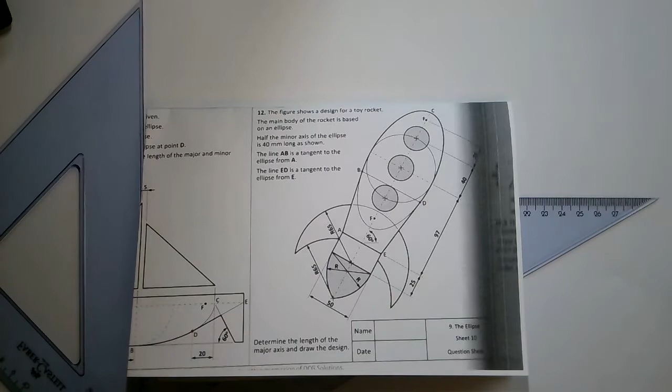All right, so this is the question that I gave you the last day. We're going to go through it quickly. Now, I'm also going to point out, when I go through this question, the last day I had my T-square and everything else set up. I'm aware some of you don't have those, so we're going to do this question entirely off set squares, just so you can see that it is indeed possible.

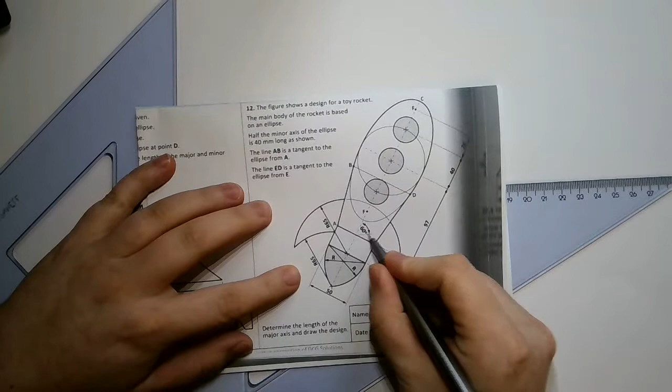So, with this question, we're going to have a look at the key features of it. Now, it is pitched at 60 degrees, so this major axis is at 60 degrees. So that's an important thing to notice. Okay. There's an ellipse here. There's a circle here. And this is just a small detail. So the majority of your marks for this question, if you're in an exam, would go for the ellipse. It would actually only be about 50-50 for the two of these.

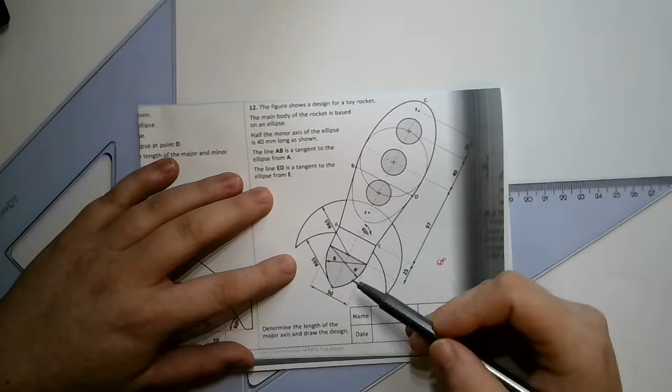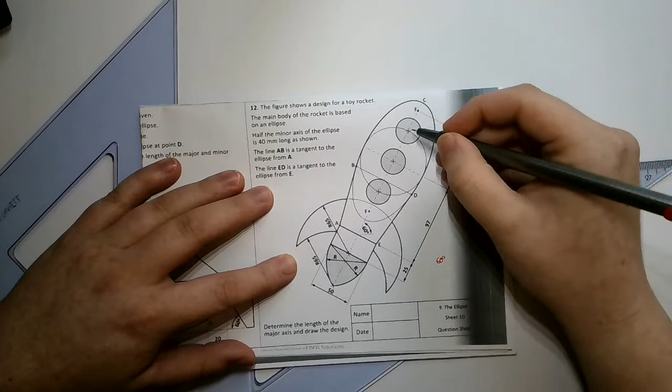Okay. Other thing they have is they've given you a focal point. That's great. And they've told you the distance that is out from the center. And they've told you the radius here of the minor circle. So once we have those, we should be able to find our major circle, because our major radius will be from here to this point here. So that distance will be our major radius. And we'll be able to work through the rest.

So, starting this question. If you just have set squares, what you're going to do is you're going to set your set squares up like this. So, have it so they'll be able to slide like that. Bring this one up. Line it up at the top of the page. Bring it down. Now make sure you keep your anchor set square completely straight. And scribe a line. Nice light line. Across the middle of the page like that.

I'm going to zoom you out a bit there so you can see a little bit more of what's going on. Now, as I said to you before, they've said that this goes off at 60 degrees. So, what can I do? I could set my set squares up like this and go a really, really complicated way around it. Or what I could do is I can use my set squares. I can line a horizontal set square up like this and drag it down and treat this kind of like my T-square here now, so that stays still. And they said it goes up at 60 degrees. So bring this over to roughly the middle of the page and bring my axis line at 60 degrees. So that's the first main part. We have our line that's going at 60 degrees.

Now, I'm going to go to check what size that was because my printout here isn't very clear. So that's 26 millimeters to the focal point. Right. What I can do is I can also set up my set squares like this again. And between the 60 degree and the 30 degree angle, I can slide this over and just draw an axis line here. I don't know where that is yet, but it's in enough so that I might be able to just draw out the detail for this section here. All right, just make sure that the focus is working on this.

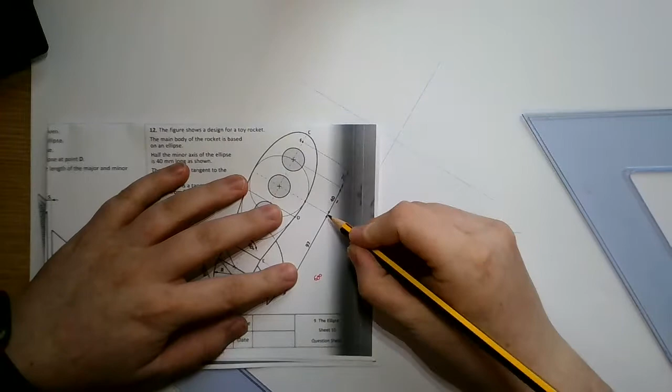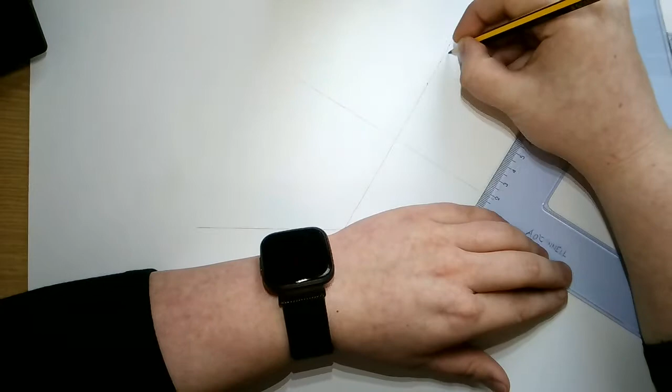Now, so what can I do? I can measure out 40 along my line and I can measure out 26. So I can measure out 40 millimeters. Remember, that's the radius of my minor circle. And from there, I can measure out another 26 millimeters. I can extend that line and go to 26. And that's where my focal point is. So label that F2. Grab your compass. And from here to here is our minor circle.

So we can swing that. So this is the minor circle of our ellipse as well. Just remember that. We know that the distance from any focal point to the end of the minor axis, that's the radius of the major axis. Give it a second to focus there.

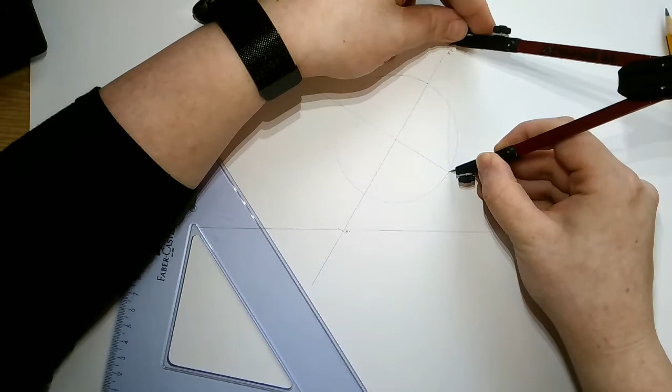And what I can also do is I can measure the distance from here to F2 and swing that back the other way to show off where F1 is. Okay. So I'm going to mark off where F1 is. Coincidence that it's that close to the line for me. F1. I said this is the radius of the major circle, so I'm going to take that distance and swing another circle around.

Okay. So we have this much information. I'll zoom in just to this for a second. Now, don't know if you remember all along that I was being really, really specific about saying whether the lines that were coming out from the ellipse to draw an ellipse were horizontal or vertical, because they're not. As I said to you before, guys, if it's for the major circle, it goes, hold on now, let's go backwards in my head. So if I was drawing this, we'll split into 30, 60 to make our lives easier.

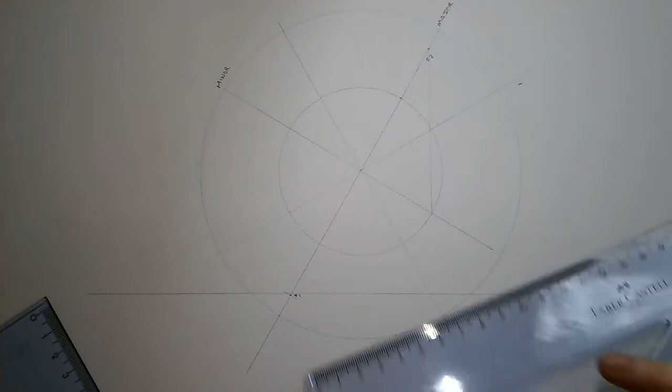So I'll line that up with, line our set squares up like this. Okay. Now, once I have my set square lined up like that, I can do my angles. So divide it into 30, 60. Remember, it's 30, 60 degrees from the axes. And if you need to label the axes so that you'll be able to find them, that's okay too. So this is my major axis. This is my minor. Just so that it's easier to find. What you could also do, guys, you could turn your sheet sideways if that'll help you. Okay. So we have this.

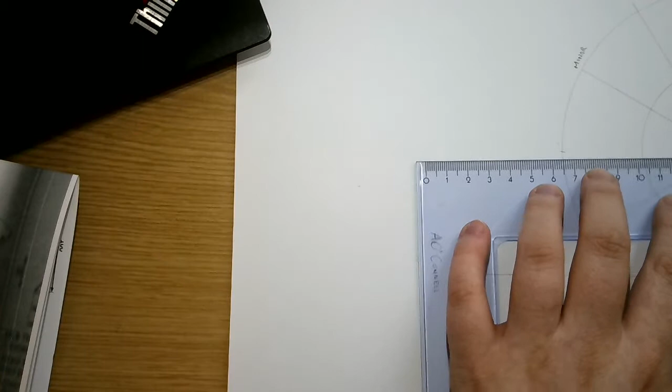I need to find all the angles I haven't put down yet now. I'll just move you out of the way a second. I'll do my next angle. And I'll do my final angle then. So this is just breaking down the 30, 60. I'm just cheating here. Don't mind me. Okay. So we have our 30, 60s drawn in there.

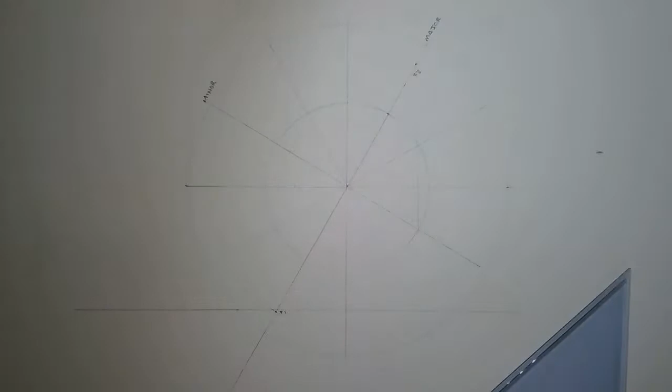Now, this looks super complicated to you. So I'm going to say for your first one, you can turn the page so that it looks like normal and retape your page down. That just takes a bit of time. So I want to keep it like this for my drawing anyway. So what we said before was that if you have a line and it's coming from your major circle, so your major axis, your major circle, okay, line these up. So if it's coming from your major circle, this one up here, or this one here, it goes towards your major axis. So this one comes down, this one goes up. That's why I'm really specific about saying that, lads.

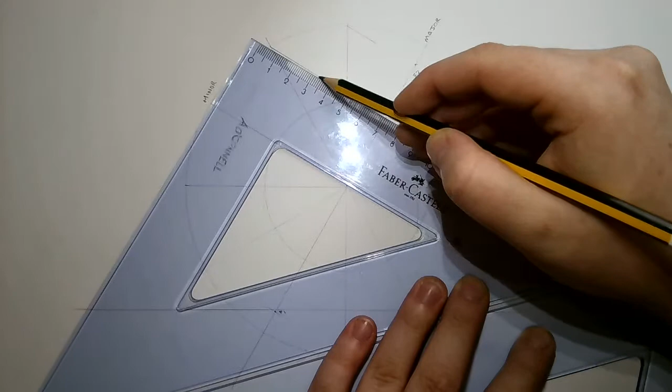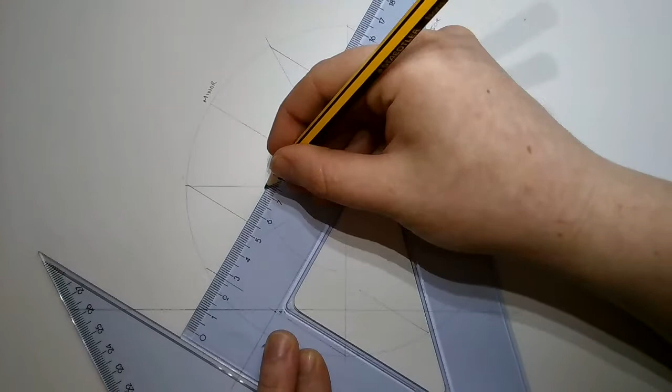It goes parallel to the minor axis, but it still goes this way. All right, make sure it's parallel with the minor axis. Bring this in. And if it's coming from the major circle, it goes towards the major axis. From the major circle towards the major axis. Okay. And the other one we've said, I'll do this one actually, is parallel to the major axis this time. If it's going from the minor circle, it goes away from the minor axis. So the small little fella runs away, the bigger fella runs towards the fight, if I can use that analogy.

Okay. Bring these lines out. Remember now, lads, this is a little bit messy. And again, the reason it's messy is because I'm doing my lines a lot heavier than you should be, so that you'll be able to see them. Now, once I've that done, I can plot my points. I'm going to do this in colour again, just so you can see it. So there's 1 point, 2, 3, 4, 5, 6, 7, 8, 9, 10, 11, 12, and back to 0 again.

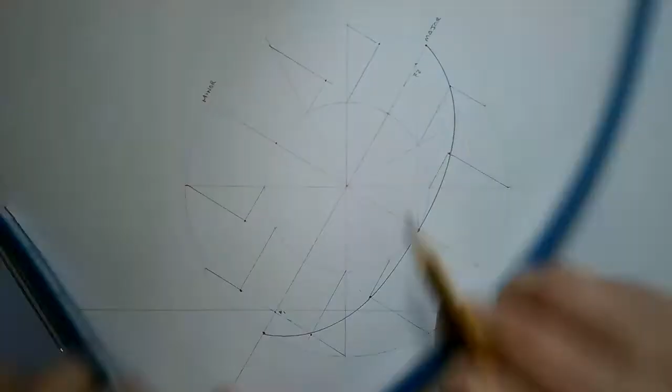So that's my ellipse. Now there's this fun little tool, you don't need it, but it just makes my life a little bit easier, especially when we're on the camera. So you don't need to run out the door telling your parents you need to buy this, guys. That's that bit of the curve. Oops. Okay, put this one in. And so on and so forth. So just give me 2 seconds to do this.

And the last one. Alright, so there's the ellipse drawn. Not the best thing in the world. That shouldn't be as pointy as it is. But still, with the main bit of that work done.

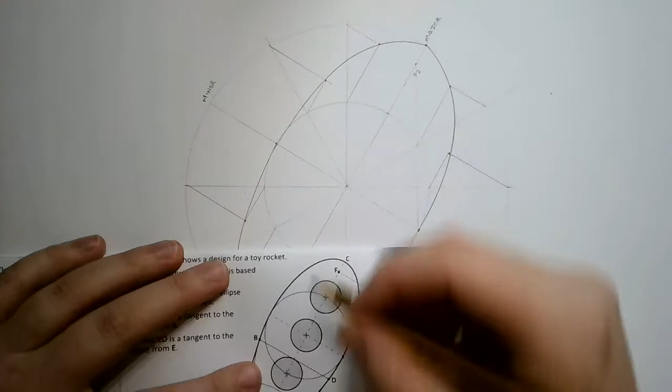Okay, next thing is, they've said if I come 26 millimeters in, or just where this circle crosses over the center line, I'll be able to draw these small circles. Now, I don't see a radius given there so far. They've given one radius. They've given BD. Do they tell us information about BD is the question.

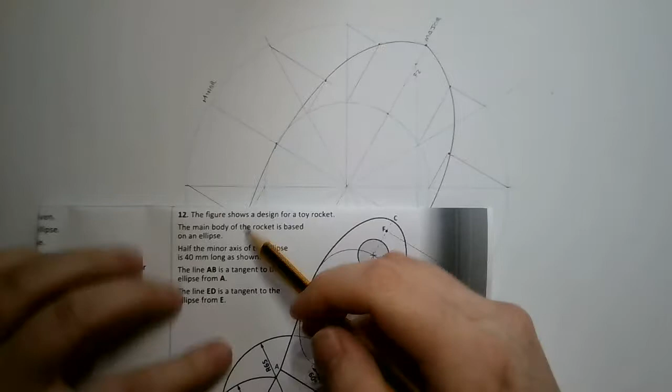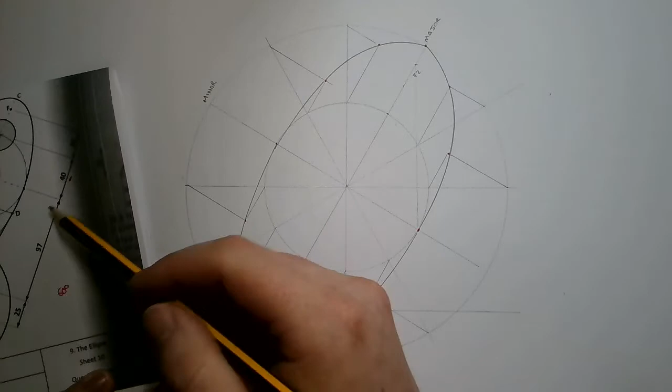So the line AB, they say, is tangent to the ellipse from A. So there's one of the constructions that you've done before. So if you need to go back to your books, by all means you do. So how did we find a tangent to a point on the curve? So first of all, we need to find out where that point is anyway. That point is 97 millimeters back from the center axis here. So I'm going to zoom you out again.

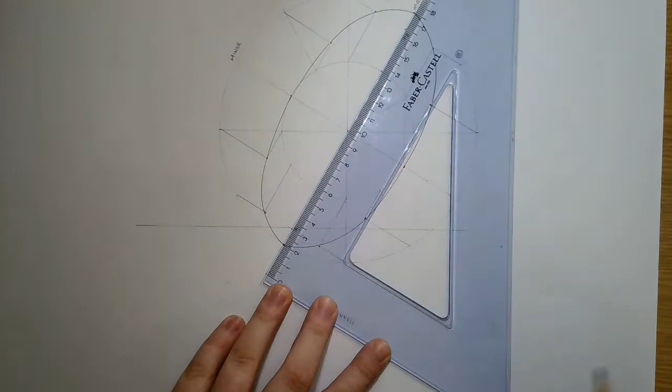Okay. 97 millimeters back from the center of this. That's where this point is. I'll be able to go parallel to my minor axis using my tee and set squares through that point. Okay, so once I have that bit of information, what I can do is I can look at this question again. And what information does that give?

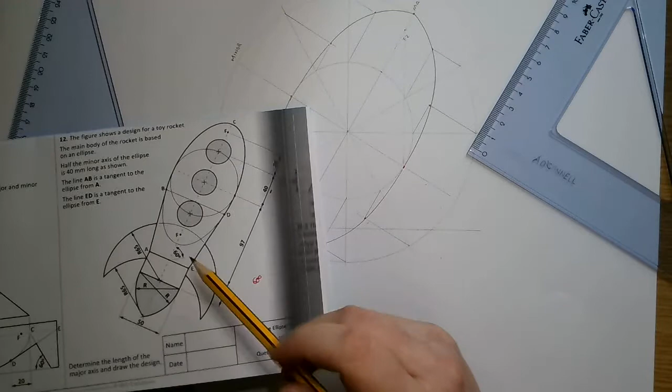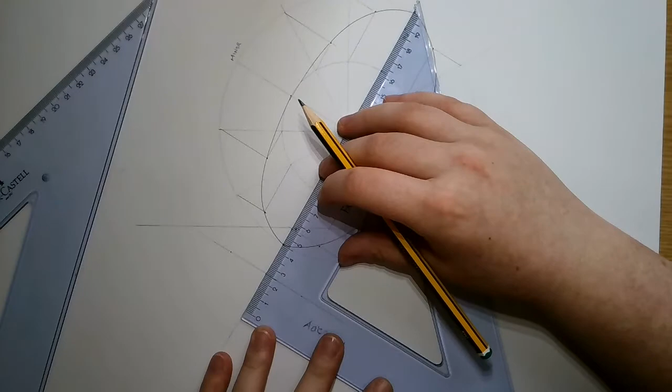So we need to go back another 25 to get this line. And the width of it is 50. So if I measure out 25 on both sides of this line, I'm going to get the width of it. So here's 1, here's 2. And we need to go along the center line. So if I can extend that out, I need to go along the center line, and I need to go out another 25 millimeters there as well. So at the moment, we are drawing this section here.

So, I started saying so a lot in my videos.

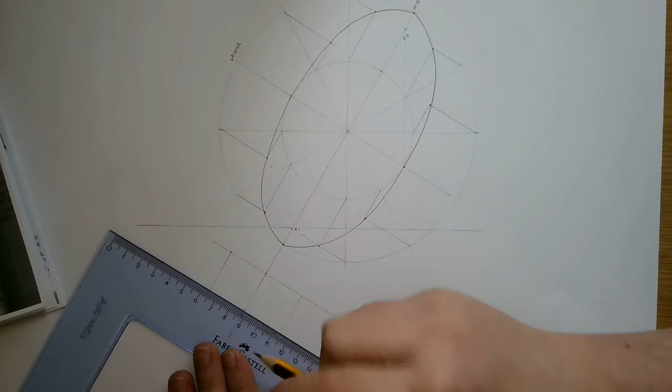We'll go parallel out here, nice and light because these are constructions. I'm going to go parallel out this way. And I can draw that line in solid heavy there.

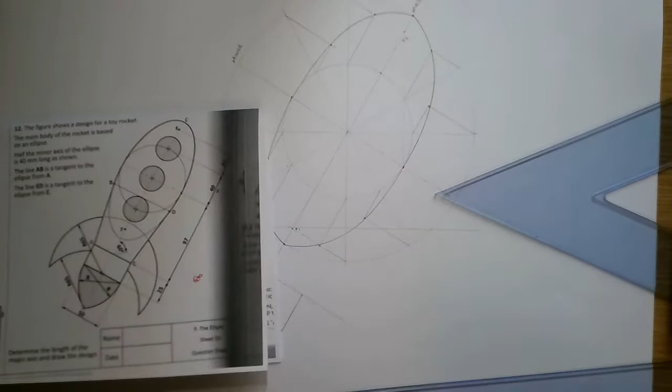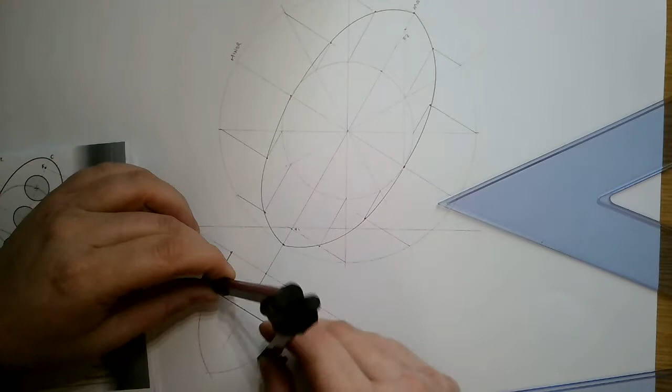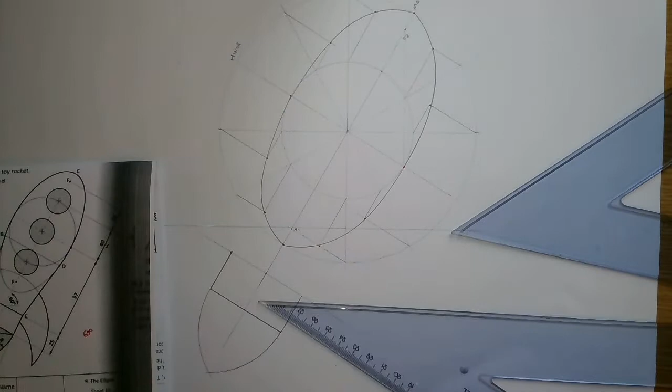They've also told me that 65 from this center point here, if I wanted to draw this circle. And they've told me it's 65 from the top point here, if I want to draw the bottom half of that circle. So we'll do that now. So we can measure 65 on our compass. Okay.

Where have they said? So they've said from here, from the first point. I won't know where this stops, so I'm going to have to do it quite large. All the way around. And they've said to find where it ends, you put the needle, the apex down here, and you swing that exact same mark again, and it'll lap over there somewhere. Okay, we can tidy things up now.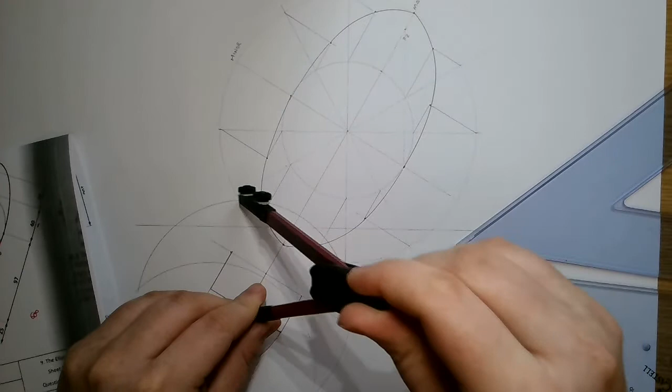This comes up. We don't quite know where till. Okay. And this comes up to here. Now, that drawing looks really, really messy at the moment, but that's okay.

Sorry there, guys. Right, so I'm going to leave you that much for this video because it's getting a bit long. In the second video, we're going to do the tangent from the line BD. So we're going to have to find that line. I'll put in these 3 circles there.